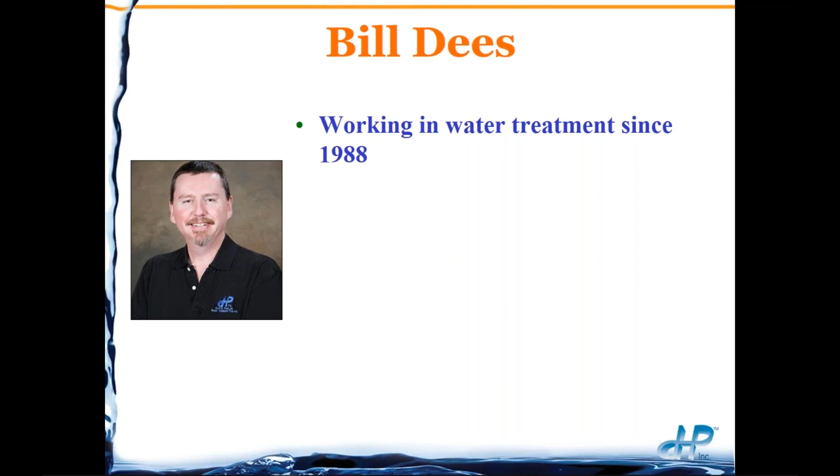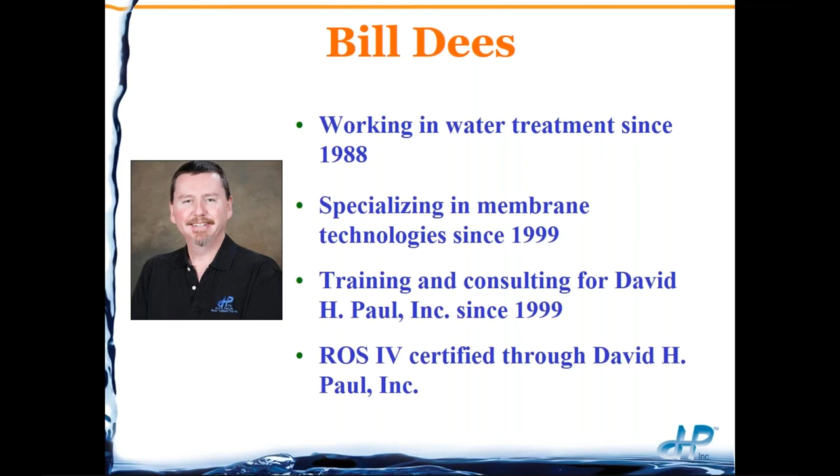My background: I've been working in water treatment since 1988, specializing in membrane technology since 1999 when I started working for David H. Paul Incorporated as an instructor and consultant. I'm also RO Specialist 4 certified through David H. Paul Incorporated.

Eli began in the pump industry in 1980 as manager of an R&D laboratory at Union Pump Company. He's founder and president of Pump Engineering Incorporated from 1986 to 1997, where he developed the Turbocharger, and then in 1997 founded Fluid Equipment Development Company, or FEDCO, where he is CEO and Chief Technologist.

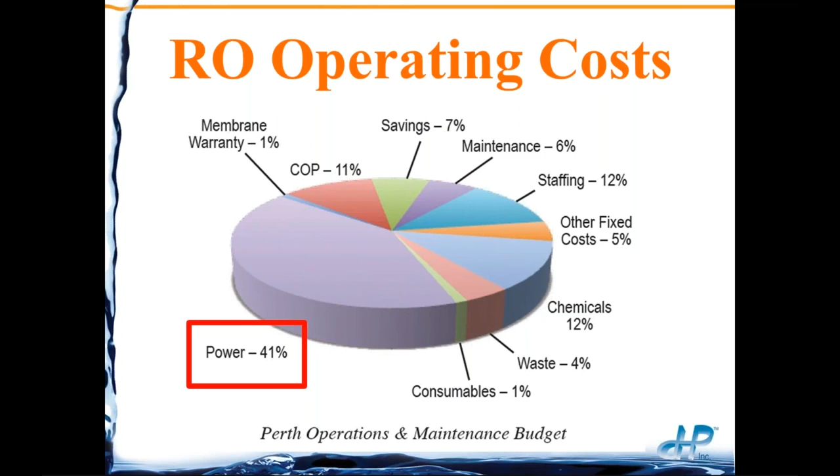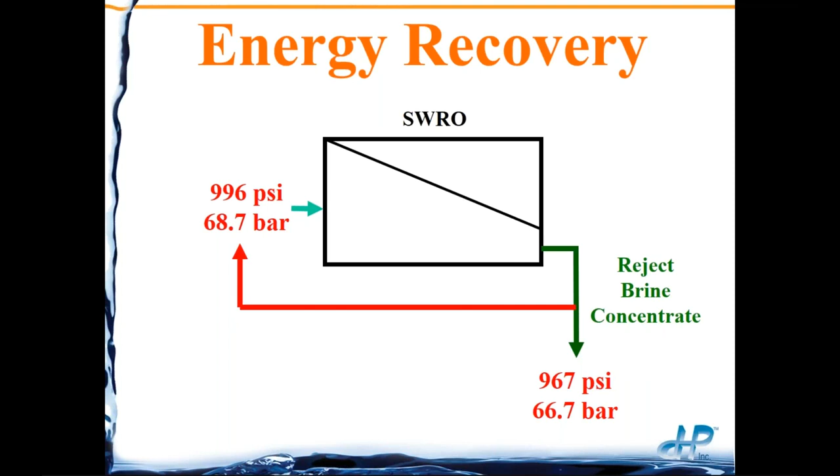Starting off with energy recovery: the biggest portion of RO operating costs is power. For example, with the Perth operation maintenance budget, we're seeing power at 41%. That's because seawater RO systems can operate as high as 1,000 psi or 70 bar of pressure on the feed coming in. With that amount of pressure going through the RO system, it would not make sense, it would not be cost feasible, to operate the unit with all that energy going down the drain. We need some way to collect that energy and transfer it back to the front end, to be able to operate at the higher pressures needed.

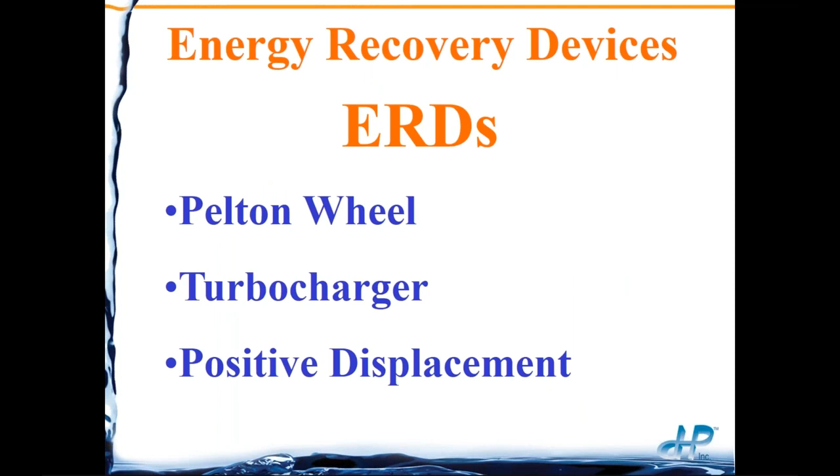So we need to have these energy recovery devices, and there are 3 basic categories of ERDs: the Pelton wheel, turbocharger, and positive displacement.

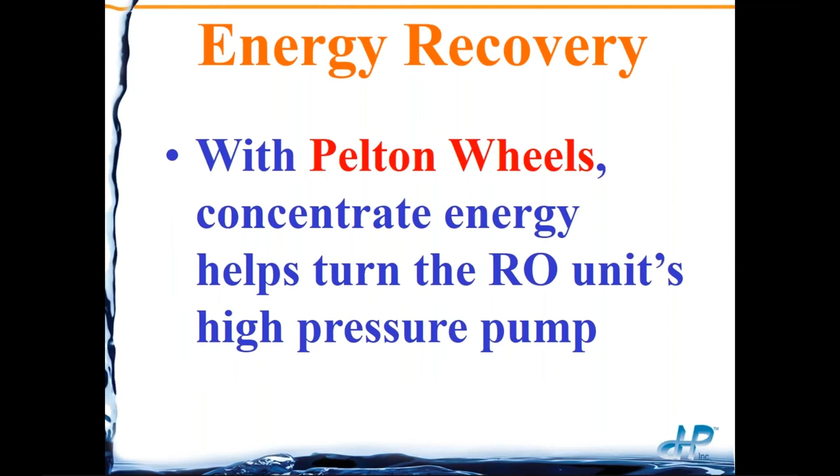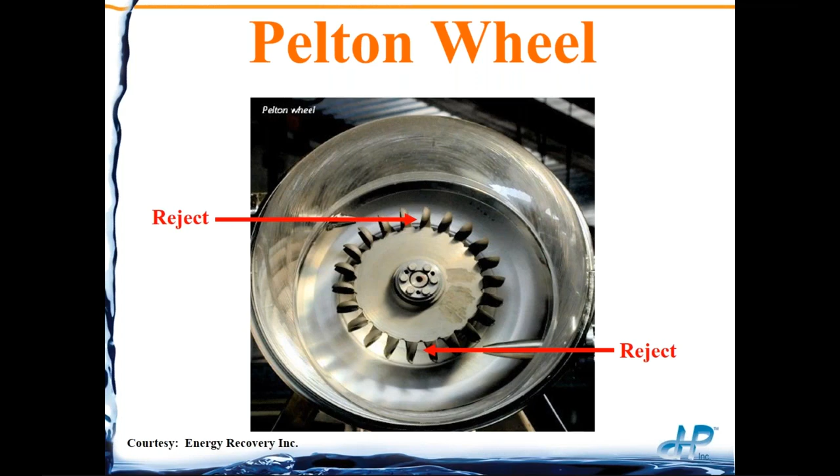The Pelton wheel takes the concentrate, or waste energy, from the RO unit and transfers it into the high pressure pump shaft. For example, we have vanes that are directly connected to the high pressure pump, and reject nozzles forcing water aimed at these vanes to help turn the shaft of the high pressure pump.

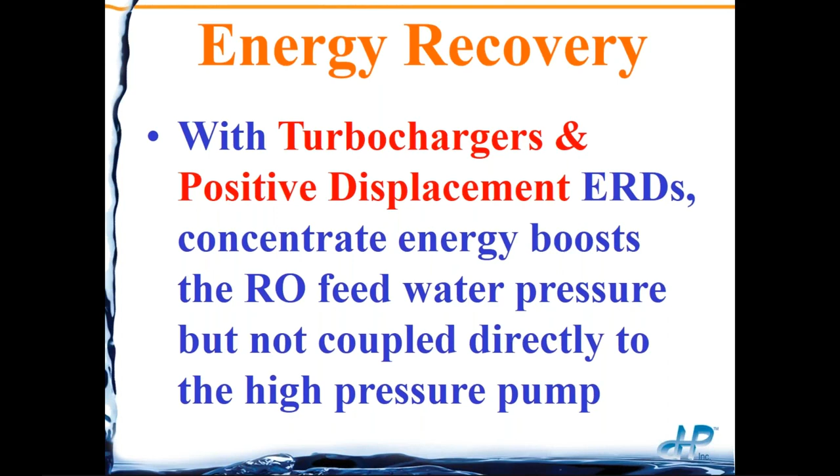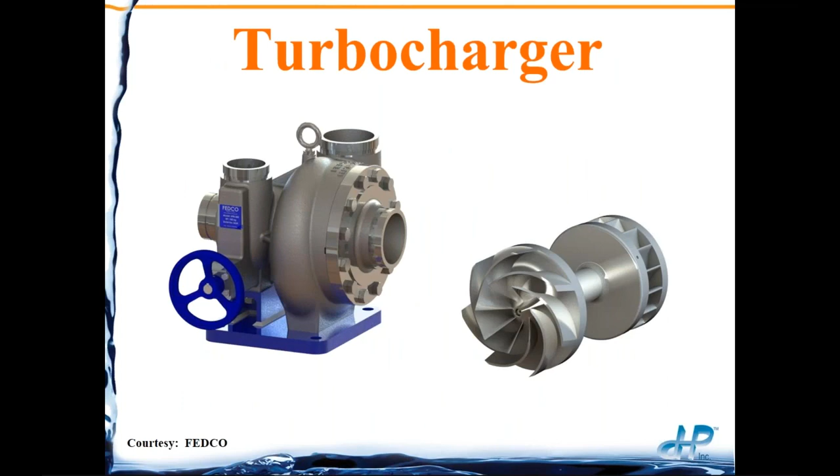Turbochargers and positive displacement ERDs take the concentrate energy and boost the RO feed water, but they are not directly coupled to the high pressure pump. For example, here is a turbocharger showing the impellers on the right hand side. The concentrate comes out, going through the impeller on the left-hand side and then exiting out. That impeller is directly coupled to the input impeller, which then boosts the pressure going to our single stage RO system. As shown in the upper right corner, the turbocharger can also be put in a two-stage system, utilizing it as an interstage booster pump.

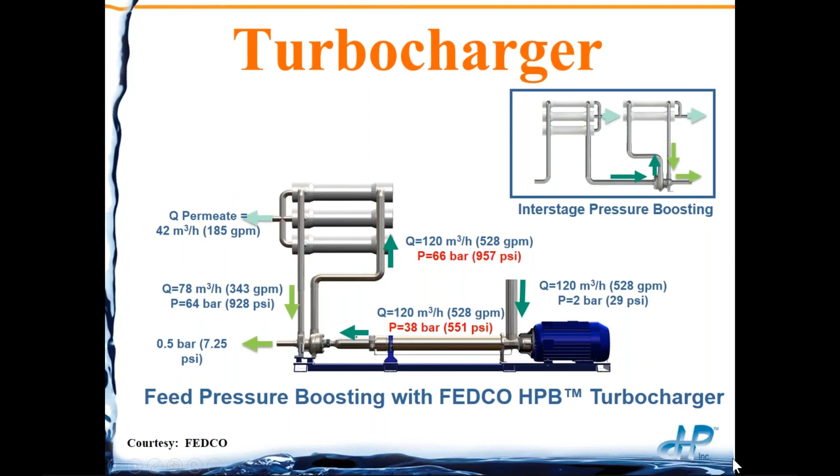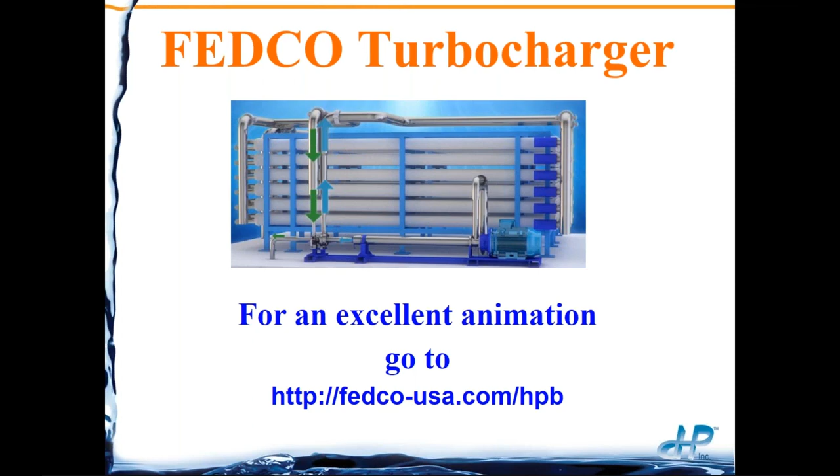Here's an example of a large turbocharger installed. Besides this presentation, you can go to FEDCO's website for an excellent animation so you can see exactly how these turbochargers also operate.

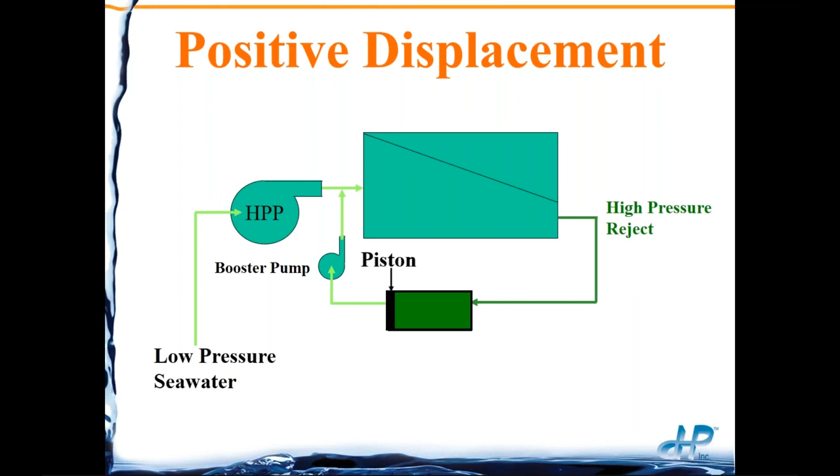For the positive displacement type setup, we have our high pressure pump with low pressure seawater coming in, going through the RO system. Now we have that high pressure reject that we need to reclaim energy from. There's a device with a piston that moves back and forth, and that high pressure reject pushes the piston over, forcing the low pressure seawater into the front end of the RO system. Since we have a pressure drop across the RO system, we won't get up to the higher pressure the high pressure pump puts out, so a booster pump is also installed to get up that remainder of the pressure.

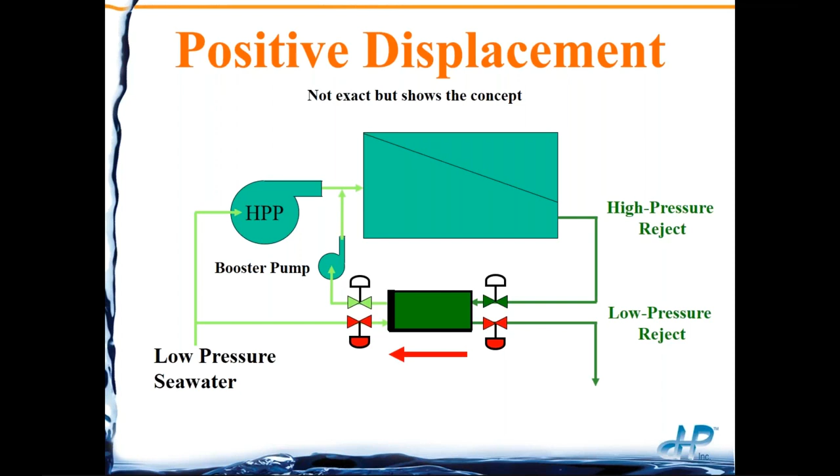As a concept here, not exact, just to show what we have with positive displacement: we have 4 valves with low pressure. The bottom valves are open. Low pressure seawater comes in, pushes the piston to the right, the low pressure reject valve is open, which then goes out to atmosphere. The valves automatically switch to the high pressure reject, opens up, pushes the piston over towards the left in this example, and boosts the pressure going into our feed water source.

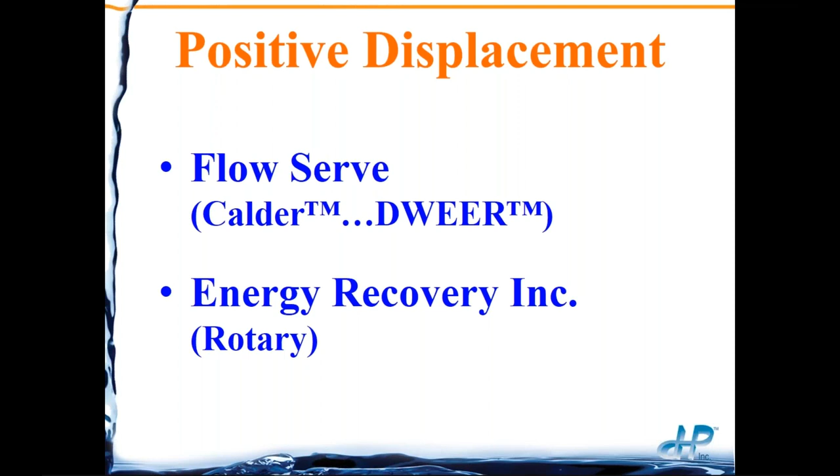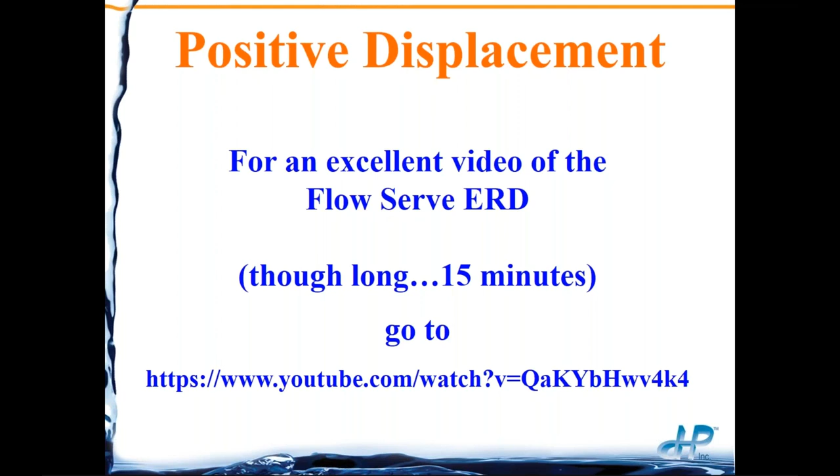So now I'm going to turn this over to Eli, and he is going to describe the turbocharger setup.

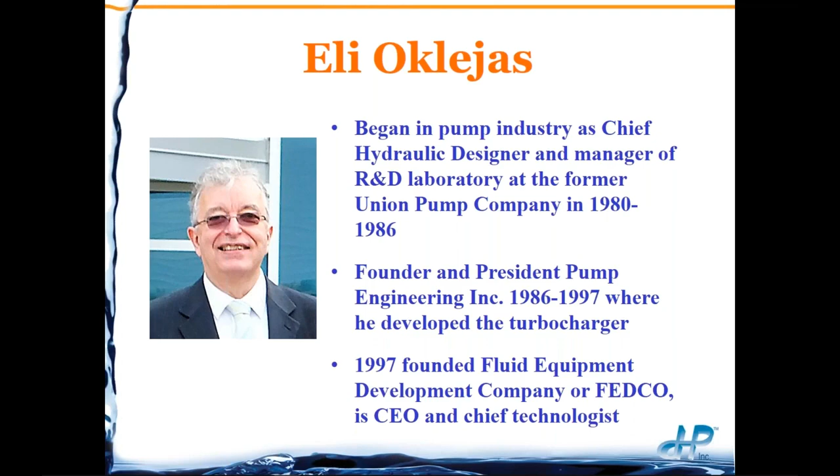Eli? Thanks, Bill. That's a great introduction. It helps my presentation quite a bit. Basically, we're going to be talking today about FEDCO turbochargers, plus we'll be taking an overview of other ERDs so we could do a fair comparison between the technologies.

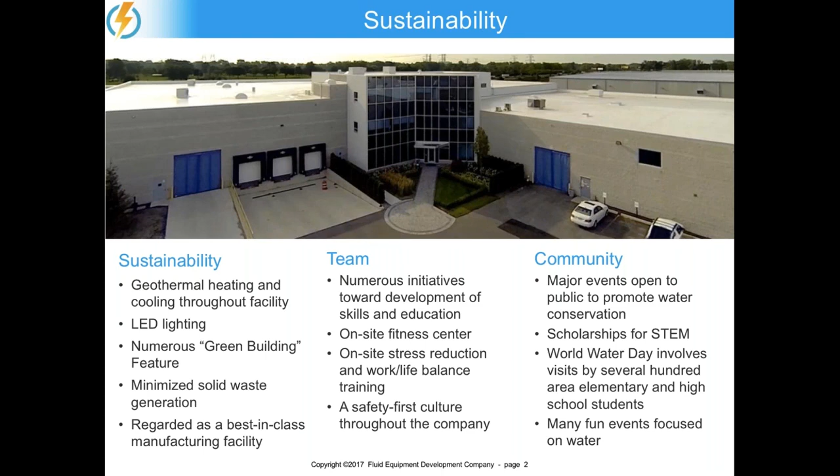Sustainability includes the community as well. We have major events open to the public to promote water conservation. We provide a number of scholarships for STEM students - science, technology, engineering, and math. We have a very high-profile World Water Day observance where we invite the public to our facility to learn more about water, sometimes with up to several hundred area elementary and high school students. They submit posters, we have contests, and we have a lot of fun with water. We really want to get the word out about the importance of water, water purity, and water scarcity to the public.

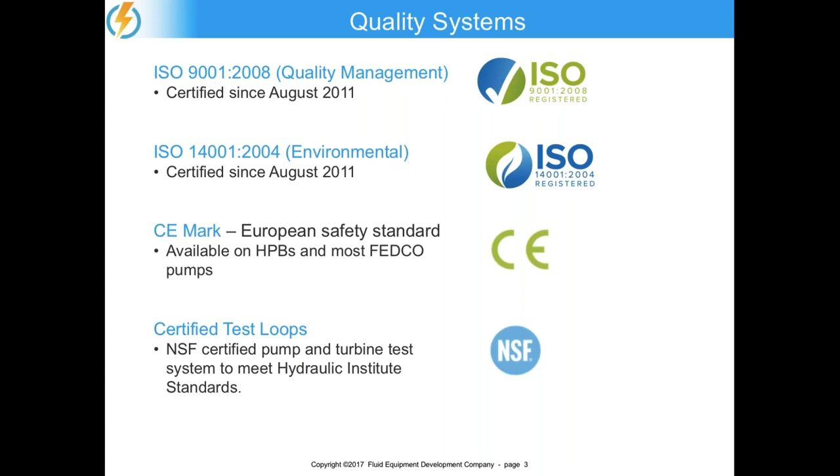Quality systems are important, of course. We're ISO 9001, ISO 14001. We have the CE mark for most of our equipment. Something not too common in our industry is our test loops are certified by a third party, NSF in this case.

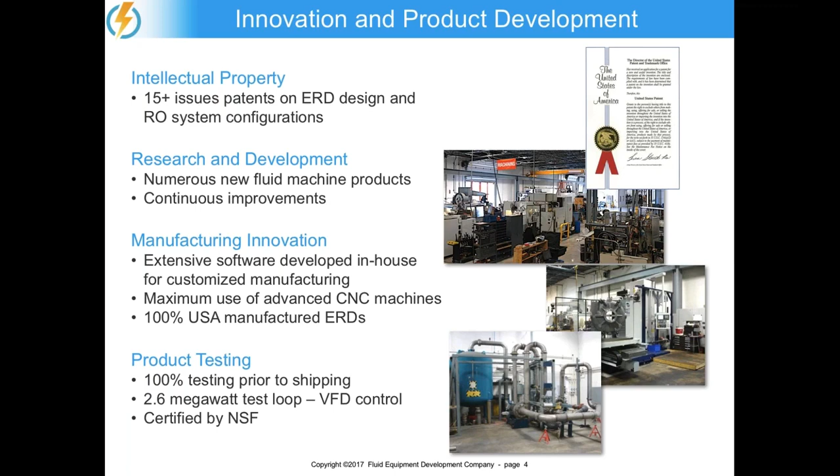In terms of product testing, all products are tested. We have a number of test loops. The biggest test loop is 2.6 megawatts under VFD control, and it's certified by NSF to comply with Hydraulic Institute and ASME test codes.

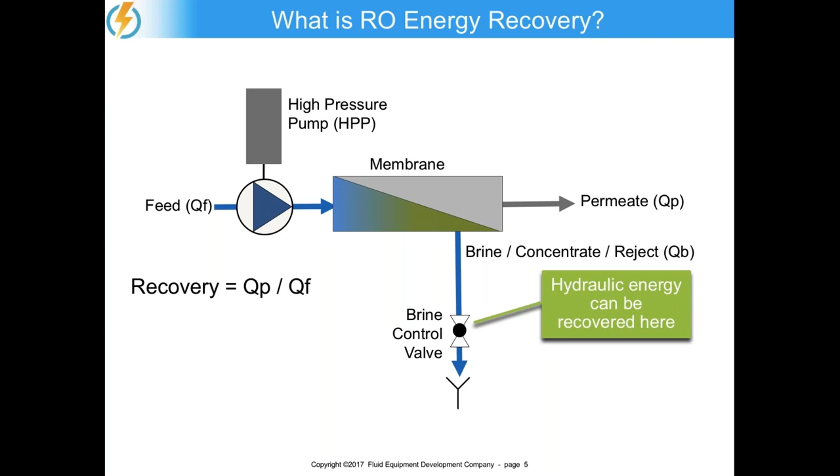An important concept here is what we call recovery. That's the ratio of permeate flow to feed flow, so we need to keep that parameter in mind as we go forward.

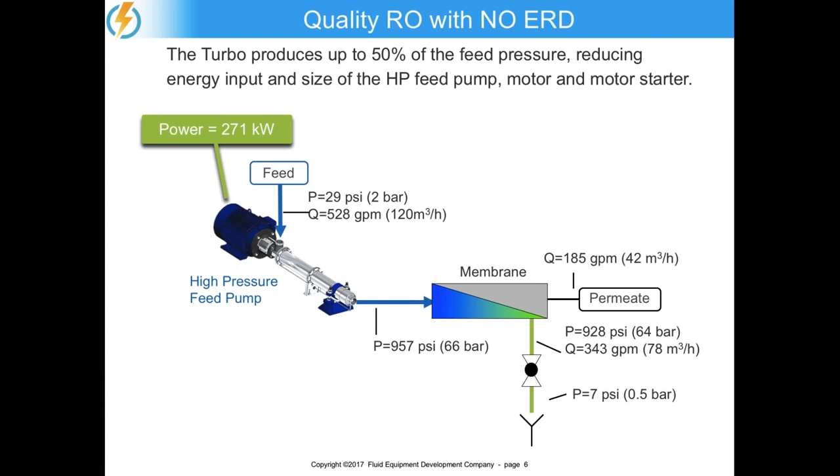When you don't have energy recovery, this is how the system looks. In this case, we have a membrane that takes about 957 psi of feed pressure. The flow rate is roughly 528 GPM. Out of that membrane array, you have a permeate stream of about 185 gallons per minute, and a reject stream of 343 gallons per minute at a pressure slightly lower than feed pressure. With reasonable assumptions on high pressure pump efficiency and motor efficiency, this system would consume about 271 kilowatts of electrical power to operate. So keep that number in mind, 271.

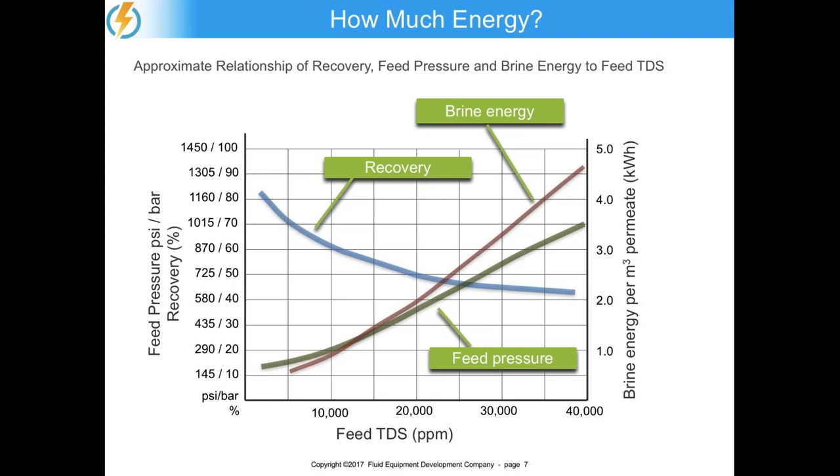So there's a big incentive to use RO energy recovery for high pressure systems. But as we shall see, it also makes sense for low pressure, low TDS systems.

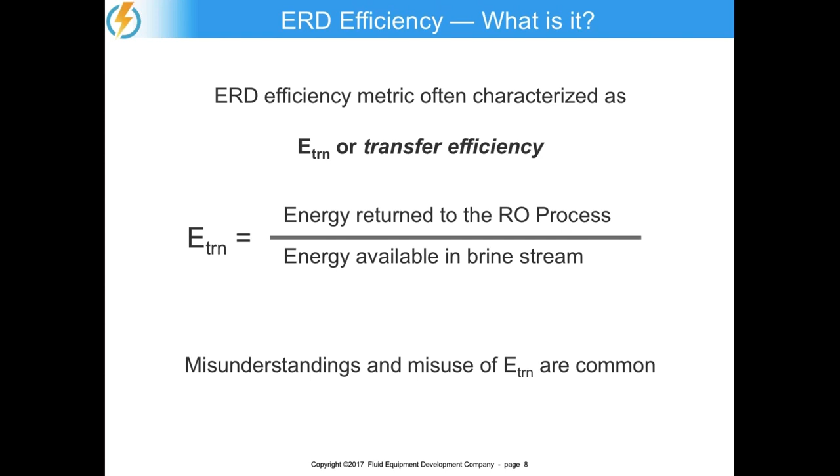Now, a metric that's used to evaluate ERD efficiency is something called transfer efficiency. It's a simple definition—basically the amount of energy returned to the RO process divided by the amount of energy available in the brine stream. It's a simple definition, and unfortunately, like many simple things, it oversimplifies the comparisons. So transfer efficiency has led to some misunderstandings and misuse, and we'll be exploring those issues and how to address them.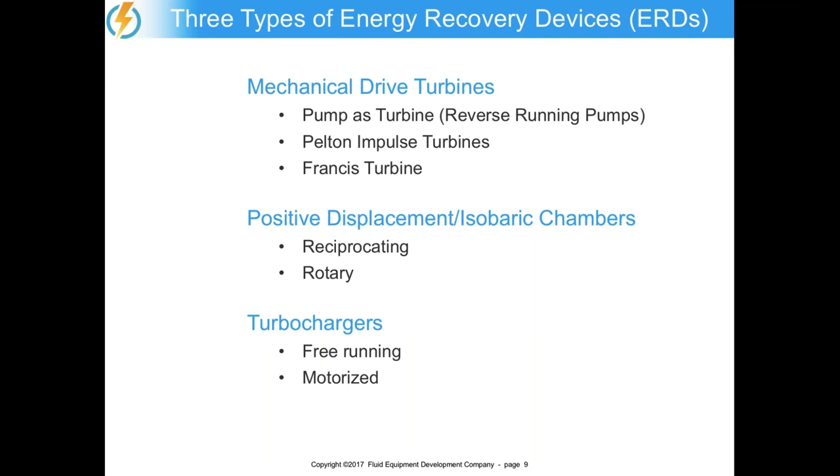There are three types of energy recovery devices, as Bill mentioned. The first classification is mechanical drive turbines, which does include Pelton turbines. The next classification is positive displacement isobaric chambers—there are two types, reciprocating and rotary, as mentioned by Bill. And turbochargers can come in two varieties, the free-running turbocharger and the motorized turbocharger.

For mechanical drive turbines, we have reverse running pumps, which were initially applied to RO systems, but they're really pretty much out of favor because they have limited efficiency and a narrow hydraulic range.

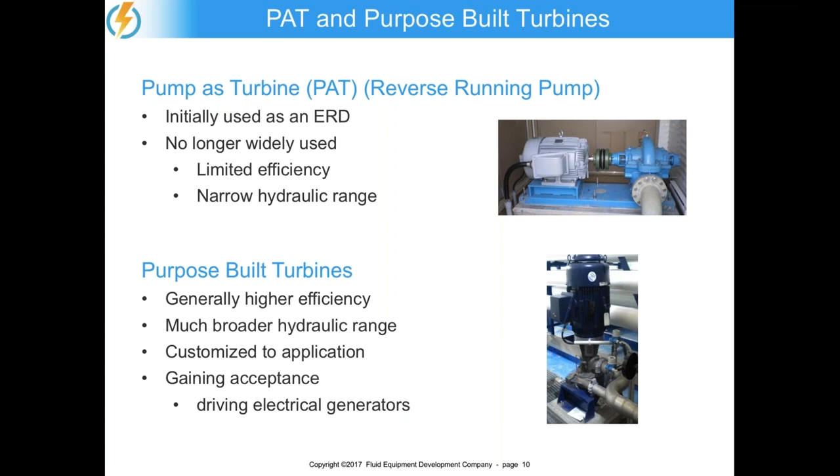Bill gave a good discussion on Pelton turbines, so we're just going to look at what we call purpose-built or mechanical drive turbines. These are designed for RO applications and for the hydraulic range and experience in RO systems. They generally have somewhat higher efficiency, much broader hydraulic range, and they're usually customized to the specific RO installation so they can capture a large fraction of the available energy. They are gaining acceptance, and generally they're used to drive electrical generators. We'll be looking at some examples of those a little bit later.

For isobaric chambers, as Bill mentioned, they basically use the brine pressing against the feed. There could be a piston, or there may not be a piston, and the two streams may be in contact with each other. Looking at the schematic, we see two pumping chambers. The lower chamber is being filled with low pressure feed, which is pushing the brine out the drain. Note that the feed water from your pretreatment system has to be at a higher pressure than your brine disposal, otherwise there won't be enough pressure to force the brine down the drain. On the upper chamber, we see high pressure brine pushing feed water out toward the membrane, and that feed water then needs to be boosted in pressure to match the membrane pressure.

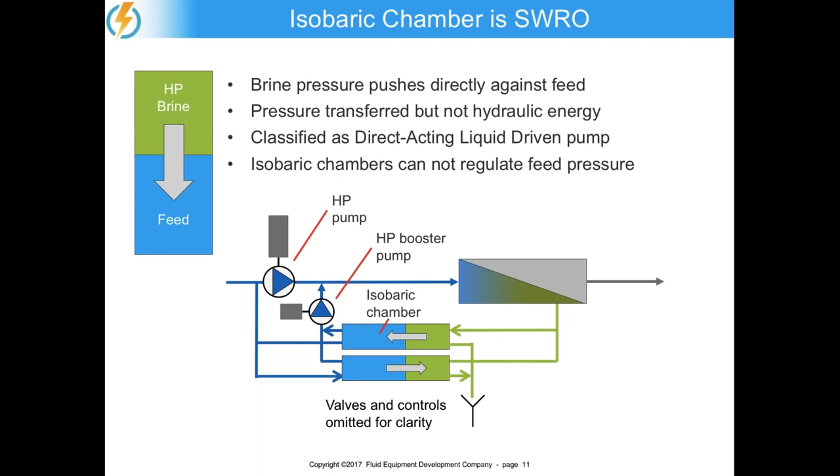A couple of things to remember—one important thing is isobaric chambers cannot regulate feed pressure. The high pressure pump establishes feed pressure.

Okay, we're going to be looking at rotary isobaric chambers in a little bit more detail. They're pretty common in many applications, so we'll take a deeper look into their operation and their characteristics.

Here we see a picture of an installation. There's 4 of these rotary isobaric chambers in that installation, and to the right, we see a simplified schematic of the isobaric system. The rotary isobaric chambers only comprise a portion of the total system. We know there's a high pressure booster pump, control valves, usually 2 precision flow meters, 4 manifolds - high pressure feed, high pressure brine, low pressure feed, and low pressure brine manifolds. There's other instrumentation required to operate the system. So it isn't just isobaric chambers we're talking about - we're talking about the system needed to make these chambers work.

Important point here is that they pump a side stream of the feed, so they operate in parallel with the high pressure pump. So the isobaric chambers reduce the capacity of the high pressure pump.

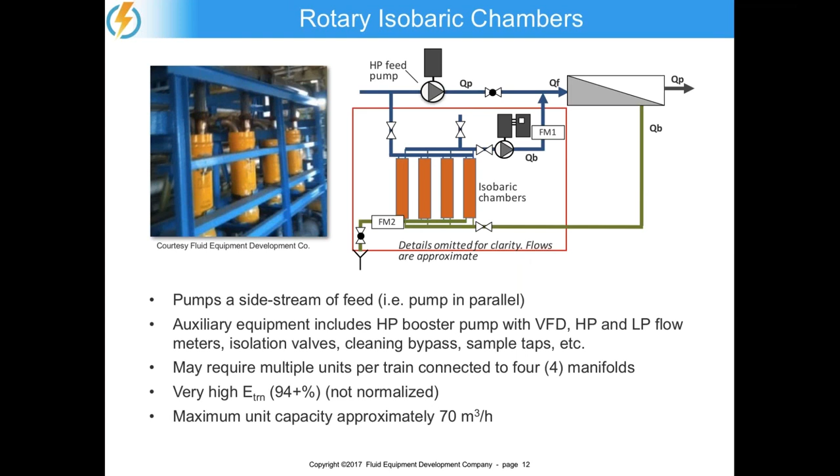As I mentioned, there's a lot of auxiliary equipment, and for whatever reason, rotary isobaric chambers seem to be limited to about 300 gallons per minute. They've been at that size range for many years, and that seems to represent the highest available capacity currently out there, or that may be out there in the near future. So for this example here, we see 4 units simply because the brine flow requirements exceeded the unit capacity, so they needed 4 units in this case.

This chart here illustrates how they function. It's a little bit hard to explain, but I'll do my best. If you look at the left cutaway, we see a dashed line that runs vertically through the casing of the unit. The left side of that line is the low pressure side of the isobaric chamber. The right side is the high pressure side.

We see passage A. Passage A is, at this point in time, accepting low pressure feed. That low pressure feed is pushing the brine out to the low pressure brine outlet. On the right side, channel B, high pressure brine is driving feed water toward the membrane. So you got these 2 fluid interfaces that ideally are 180 degrees out of phase, although there's no actual positive control to regulate their position.

So the key here is that before the fluid interface on each side of the unit reaches the exit, the rotation of that orange section, that rotor, will have carried the chamber over to the opposite side, and then they'll be subject to discharge by the corresponding stream. So if we look at channel A on the left side, it's now being filled with low pressure feed. Ideally, rotation will carry that channel to the right side of the unit before the fluid interface escapes from the unit, and the same applies for channel B. So you got these 2 channels, ideally 180 degrees out of phase.

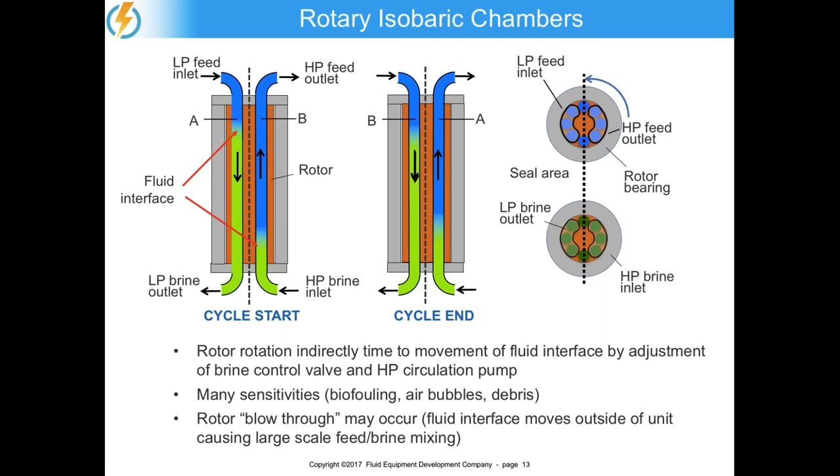Something called rotor blow-through may occur where the interface escapes the unit, and then you have a very high degree of brine entering the membrane, or a high degree of feed water going down the brine drain. There's a lot going on here. I hope that didn't confuse anybody, but the illustrations, I think, are hopefully self-explanatory.

Here's an array of isobaric chambers here. Again, the reason for the number of units is because of limited capacity. But I have to say that the fact that they could be ganged together allowed the isobaric chamber to be adopted fairly early as mega project seawater RO systems were being built.

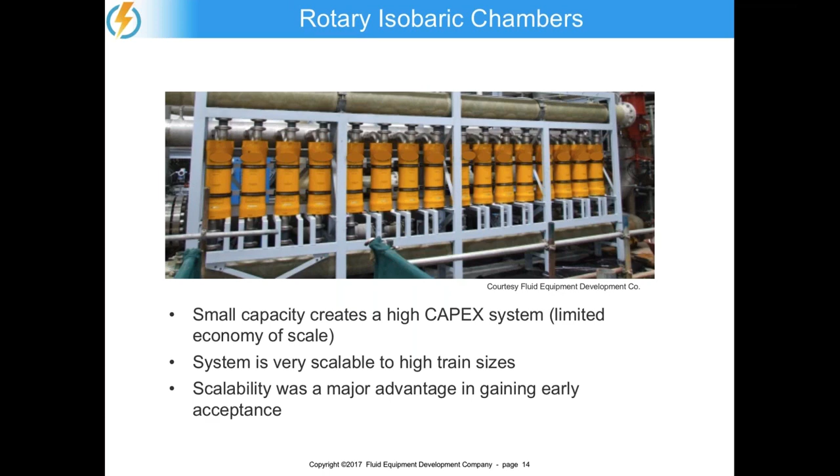ERD such as a turbocharger, which only requires 1 unit per train, had to go through many years of successively larger and larger units to prove out reliability and efficiency. The very good news, though, is that the turbocharger has now been installed and is operating successfully on the biggest RO trains in the world. So we are now where we need to be in terms of bringing this technology to all RO systems.

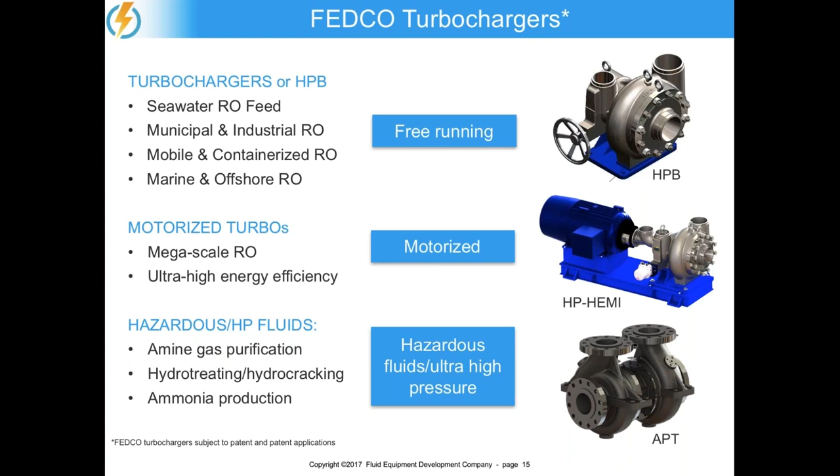Okay, there's 3 types of turbochargers offered by FEDCO. There's a free-running turbocharger, a motorized turbocharger, and a high-pressure turbocharger meant for hazardous or ultra-high pressure applications. We're going to be focusing on the free-running and motorized turbocharger for RO applications.

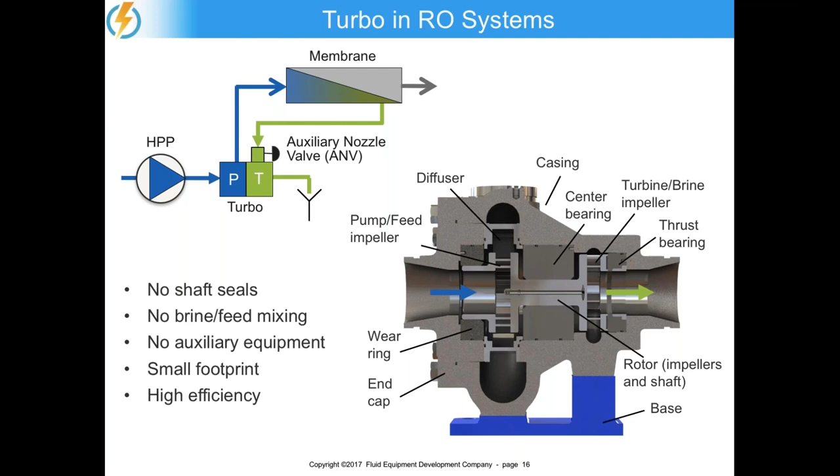There's basically one end cap to this unit. It's a very simple unit, very small footprint, and as mentioned earlier, there's absolutely no auxiliary equipment. So this turbocharger comprises the entire ERD system, and as we shall see, the efficiency is quite high as well.

What this chart shows is the blue portion, the range of FEDCO hydraulic turbocharger operating range. We go from down to about 6 cubic meters up to over 3,000 cubic meters per hour of feed water. Our smallest unit in the field is 8 cubic meters per hour, and our largest is about 2,600 cubic meters, or nearly 12,000 GPM of feed water.

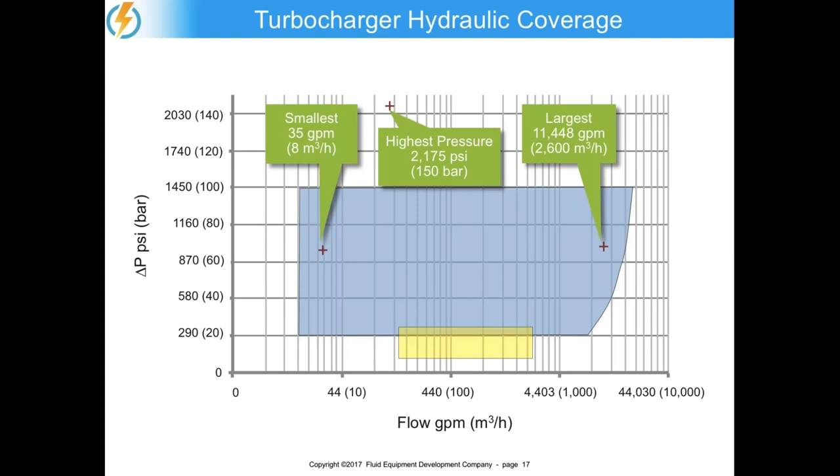The pressures typically run 65 to 70 bar, and our highest pressure unit is 150 bar. So you can see we cover a very big hydraulic range with our equipment, covering all applications from basically 4 to 5 cubic meters per hour up to the largest systems in the world.

Going back to our first example, if you stuck a turbocharger between the high pressure pump and the membrane, the high pressure pump discharge pressure is reduced down to 33 bar. If you recall, it was 66 bar, so basically the turbocharger cut the required pump pressure by 50%. Now the power consumption of the pump is 135 kilowatts.

The turbocharger is totally automatic. There's not one bit of adjustment required to start the system—simply start the high pressure pump, and the turbocharger generates the boost automatically. We can discharge brine against any back pressure; there's no linkage between brine discharge pressure and the feed pressure, and no brine intrusion into the feed stream under any operating mode.

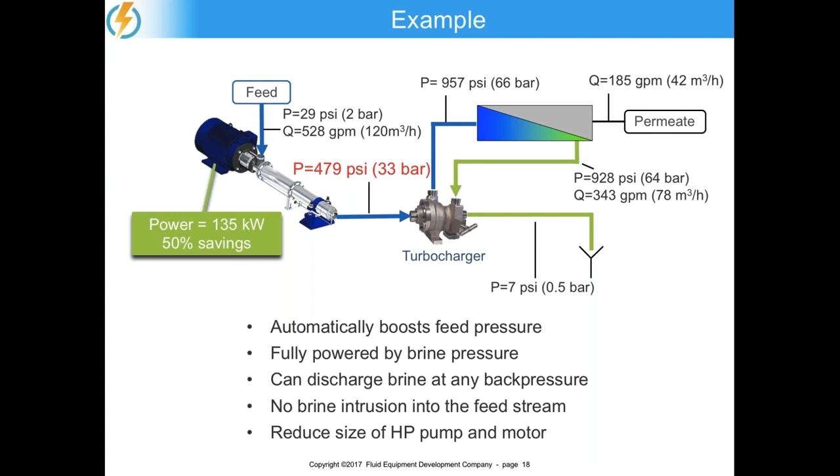And of course, the high pressure pump, motor, and VFD or motor starter in this example is reduced by 50% in its rating. So it's a big CapEx savings as well.

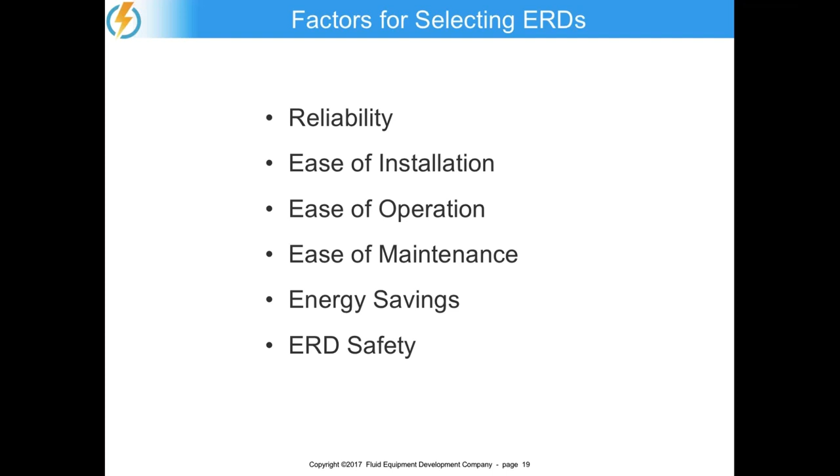So what do you look at when you select a turbocharger or select an ERD? Well, people with experience first look at reliability. They look at ease of installation, ease of operation, ease of maintenance, and energy savings. ERD safety is at the end of this list, although it's the most important—the reason it's last is we need to discuss some features first before we could talk about safety.

Okay, the rotor of the FEDCO turbocharger is unique and patented. It's a one-piece rotor, very rigid. The first critical speed is well above the maximum operating speed.

These units are custom built to each individual system requirement. We developed a very extensive array of design software and machining software that takes basically an RO projection and turns it into CNC program code, where we produce an optimized hydraulic flow path for the turbocharger on both the feed and brine sides.

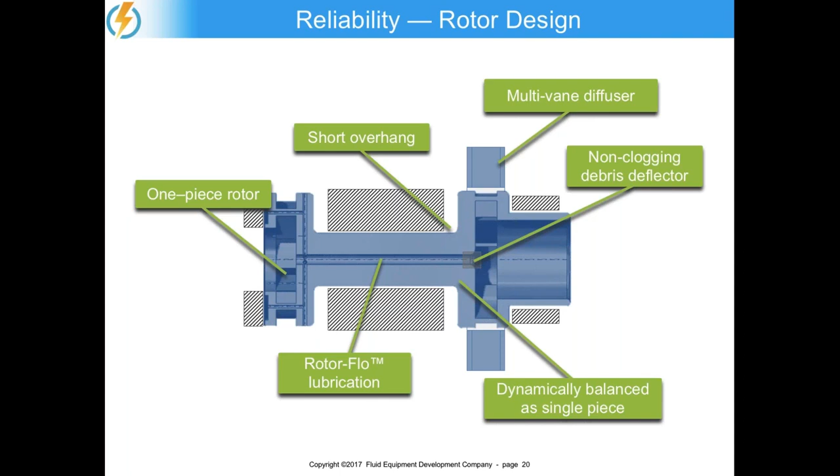This rotor includes a diffuser wrapped around the pump impeller, and we use what we call the Rotor-Flo lubrication system to bring feed water to lubricate the thrust bearing, located on the outboard face of the turbine impeller. There are many technical advantages of using this Rotor-Flo lubrication, and we'll discuss some of those a little bit later.

This other rotor, which was really my original turbocharger design way back in the day, uses multiple pieces, and I'm almost embarrassed to look at it now. It uses a stud attached to the turbine shaft, a keyway and key to secure the pump impeller to the rotor, and a retaining nut.

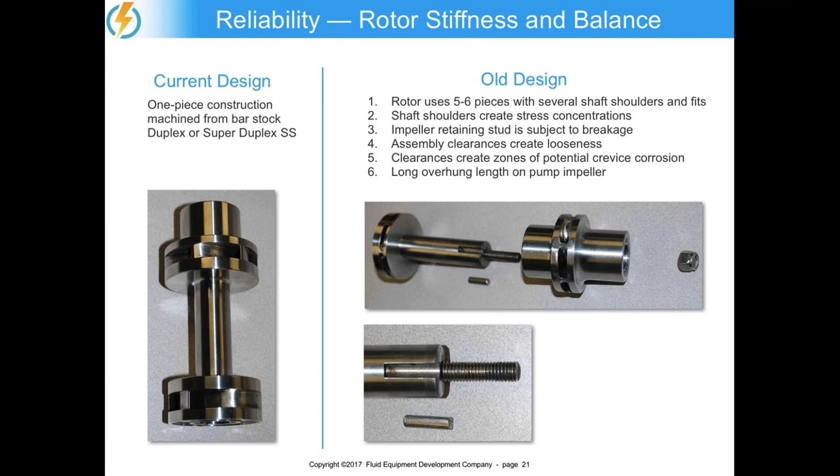Couple big problems. One is you have to have clearances to assemble this unit, which means you cannot maintain a high degree of dynamic balancing because of the looseness. The closed clearances create potential crevice corrosion sites. There's a long overhung length between the pump impeller and the center bearing location, and we'll talk about why that's important in a moment. There's also shaft shoulders, and the stud creates areas of stress concentration, which can and do fail.

We mentioned the Rotor-Flo lubrication. Here's an illustration of the rotor showing the internal passageways. It takes precision machining and a highly skilled machine shop to do this kind of work, but it's something we do every day. This has worked out extremely well for our units. We use this same design from our smallest units, handling 6 cubic meters, to our biggest units, handling up to 3,000 cubic meters per hour.

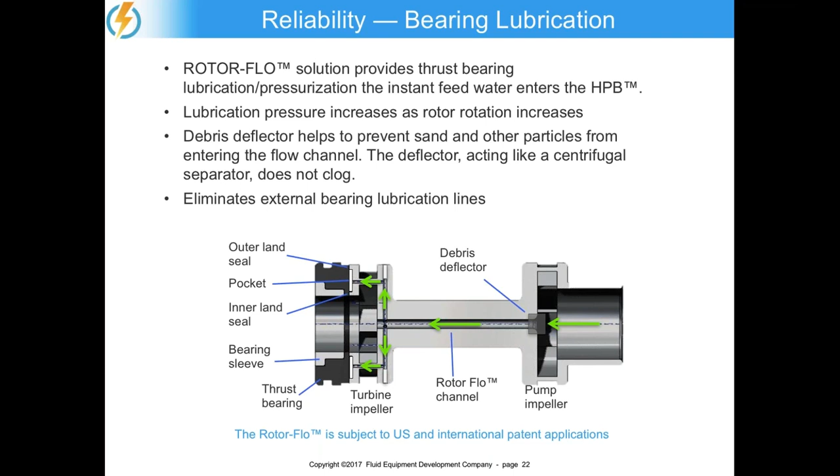A lot of advantages, among them eliminating external lubrication lines, which we'll be talking about in a minute.

We mentioned the diffuser being wrapped around the pump impeller, and why is that so important? Well, when you have a diffuser, there are many channels of flow. That results in a symmetrical pressure field around the pump impeller. So even when the unit is off design, there will still be a symmetrical, tangential pressure field around the impeller, so it would not be exposed to unbalanced radial forces.

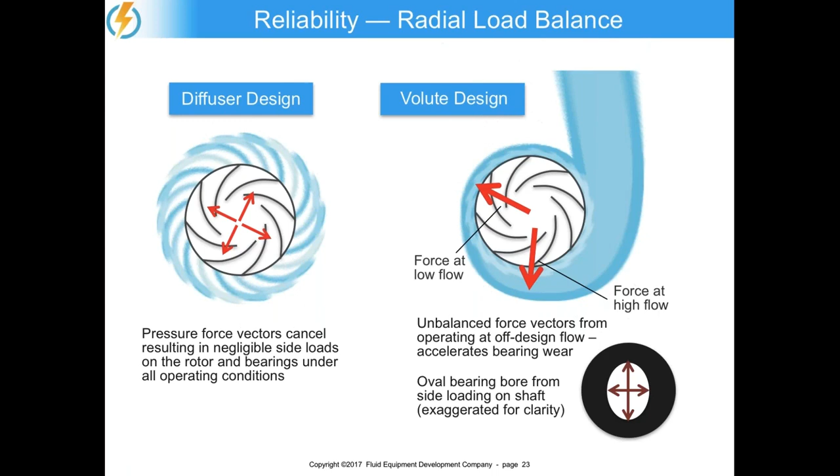What's important here is that the center bearing, which is product lubricated and doesn't have a high load carrying capacity because feed water acts as the lubricant, will become oval or egg-shaped. We've seen this many times. When the turbocharger operates at off-design condition with a single volute, you get an oval or egg-shaped center bearing.

We talked about the rotor flow design. Well, one of its benefits is it eliminates the external tubing used on other turbochargers. And these external tubes are a safety hazard, plus they represent maintenance items as well.

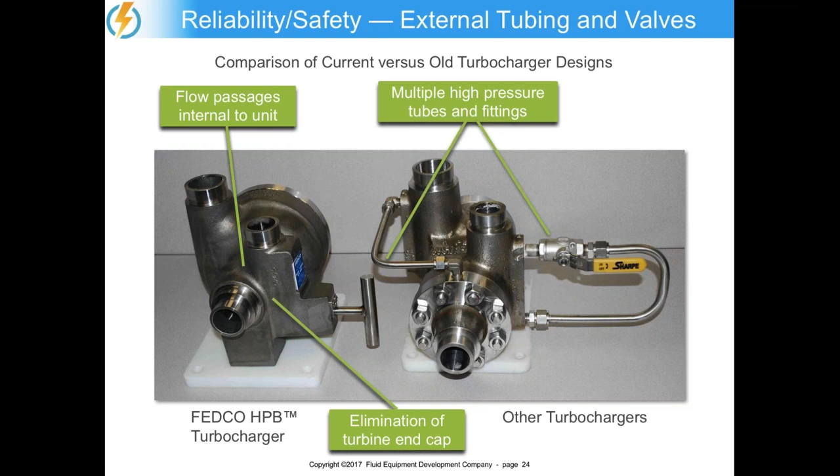You can see on the unit on the left, there's a high pressure tube which handles feed water for the thrust bearing lubrication. On the right, you see a high pressure tube with a valve, a quarter turn ball valve, that handles high pressure brine. So both of those represent leakage potential, maintenance potential, and frankly hazards. The state-of-the-art turbocharger has eliminated all external fittings and tubing.

Turbochargers are easy to install. You hook up 4 pipes, the brine inlet and outlet, the feed inlet and outlet, and that is the end of the installation. There's no auxiliary equipment, no pumps, no boosters, no manifolds. You can see a very small unit installed in the upper right photo, right next to a membrane housing, and another unit tucked into a small space near the membrane array.

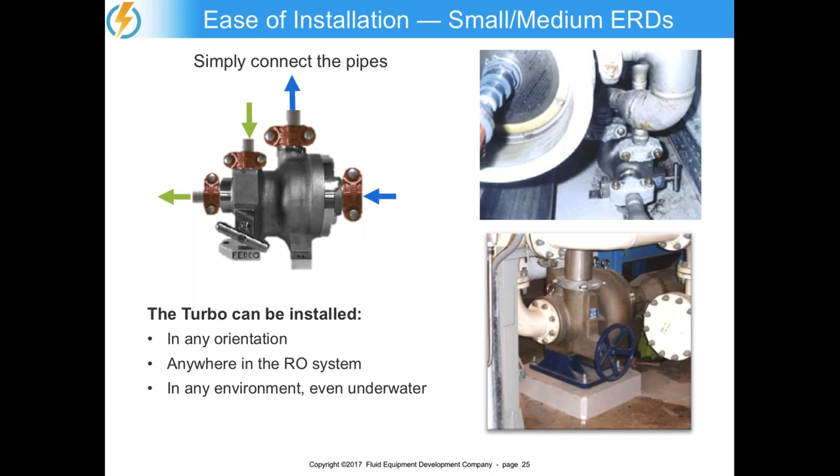Turbochargers can be operated in any orientation. They can be placed anywhere in the RO system. They can operate in the dirtiest, dustiest environments, could even operate underwater.

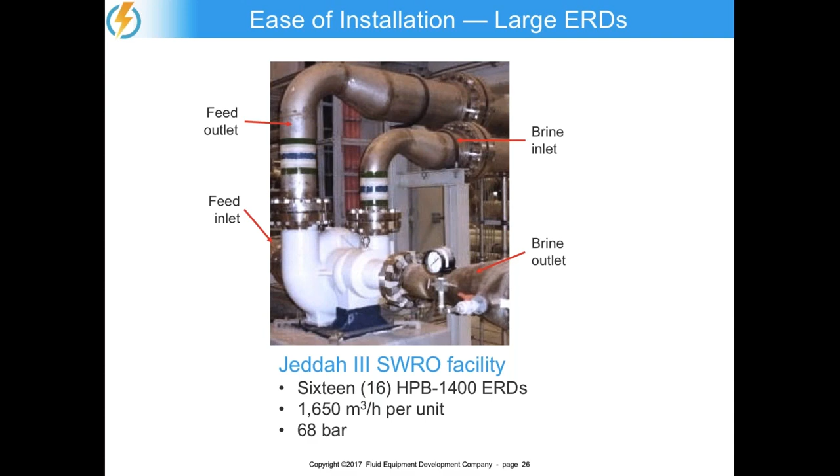We talked about one of the functions of the turbocharger being to regulate brine flow and pressure. The turbocharger does it this way: the turbine section has two nozzles. There's the main nozzle, sized during manufacturing based on the customer's operating point or points. Then there's a secondary nozzle, which we call the auxiliary nozzle, controlled by an external valve, the auxiliary nozzle valve. In the upper left illustration, the auxiliary nozzle valve is closed, meaning the brine must flow only through the single main nozzle.

This would represent an application where brine flow is low or is to be maintained at a high level. But if you need to increase brine flow or reduce brine pressure, you open up the auxiliary nozzle valve, which allows an additional flow path for the brine through the auxiliary nozzle.

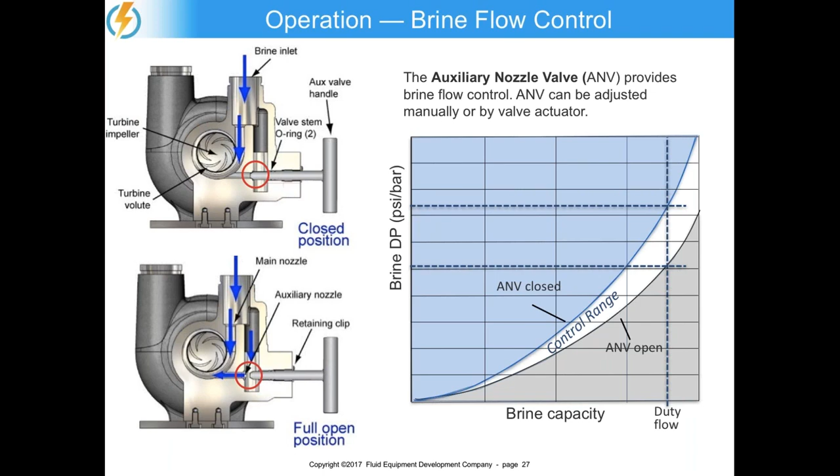The important point here is that the total brine flow still passes through the turbine impeller, and thus the total energy is recovered from the brine stream. The right graph shows a typical range from the auxiliary valve being closed to the auxiliary valve being opened.

Okay, this is where we're going to learn how to operate a turbocharger. This is it. This is, in one sense, the operating manual for a turbocharger.

To increase brine flow, open the auxiliary nozzle valve. To decrease brine flow, close the auxiliary nozzle valve. That's it. That's the end of the education.

And it's actually quite important because when a plant is commissioned, you have plenty of training. Everybody's excited, everybody knows how to run the plant. But after a few years, plant personnel change. If you have a complicated ERD system, you're going to have to do a lot of training on the new plant people, and they're going to go through a learning curve.

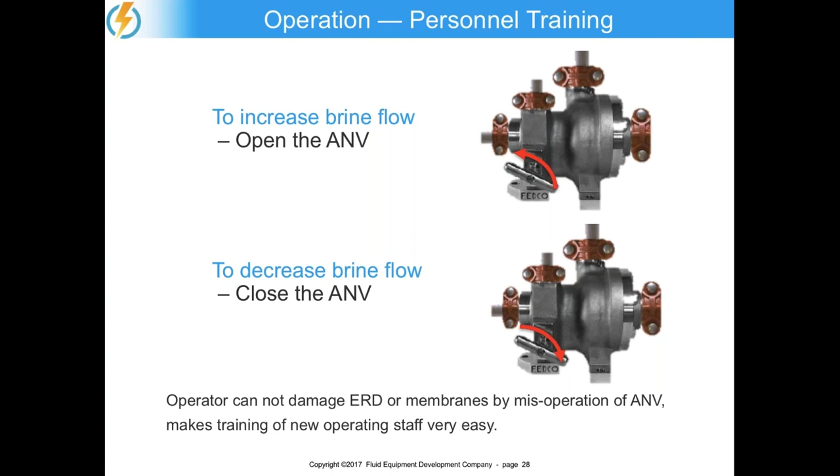With the turbocharger, this is the instruction: open the valve or close the valve. Very, very simple. There's nothing really an operator can do to harm the system through misoperation of the turbocharger.

Maintenance is equally easy as operation. Remove the end cap, push out the rotor cartridge, push out the thrust bearing, and to install a new thrust bearing and rotor cartridge, you simply push them in by hand.

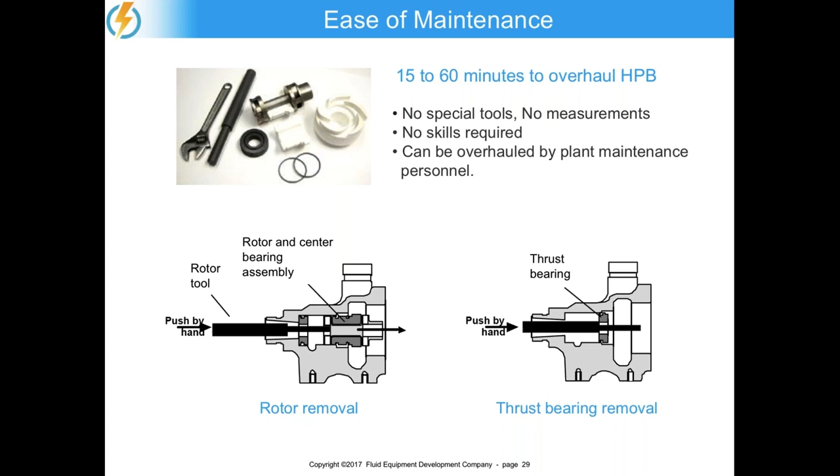A small turbocharger can be overhauled in 15 minutes. A large turbocharger may take an hour to overhaul. It could be overhauled by plant personnel. There's no skills required, no shims, no precision measurements. Simply undo the end cap, push out the old, push in the new, and that is it.

We talked about transfer efficiency and how it's in some ways useful, but it's also misleading. So what we do is apply normalization correction factors to transfer efficiency to account for the differences in ERD operation between isobaric chambers and turbochargers. If you don't do that, you'll be comparing apples to oranges, not the same efficiency. This table walks us through how to normalize transfer efficiency.

For the rotary isobaric chamber, it starts off great: 95% transfer efficiency. The highest turbocharger efficiencies we've obtained so far are 84%.

Now, we talked about the brine feed mixing in an isobaric chamber. Well, that's going to raise osmotic pressure because of the higher TDS of the feed stream. And when you run membrane projections to gauge that impact, it results in about a 3.8% increase in operating pressure. So that loss has to be charged against the isobaric chamber.

Large isobaric chamber systems have extensive manifolds and valves. We assume 1% pressure loss on the feed side, 1% pressure loss on the brine side, manifolds and valves. So we say a 2% loss of energy in the manifold and valve array.

We mentioned that the isobaric chamber pumps a side stream, or operates in parallel with the high pressure pump. That means the high pressure pump is handling a smaller feed flow than the feed to the membrane. In contrast, the turbocharger feed pump handles total flow, but at reduced delta P. So with the isobaric chamber, the high pressure pump handles a reduced feed flow at maximum feed pressure, while the turbocharger handles full feed flow at a reduced delta P.

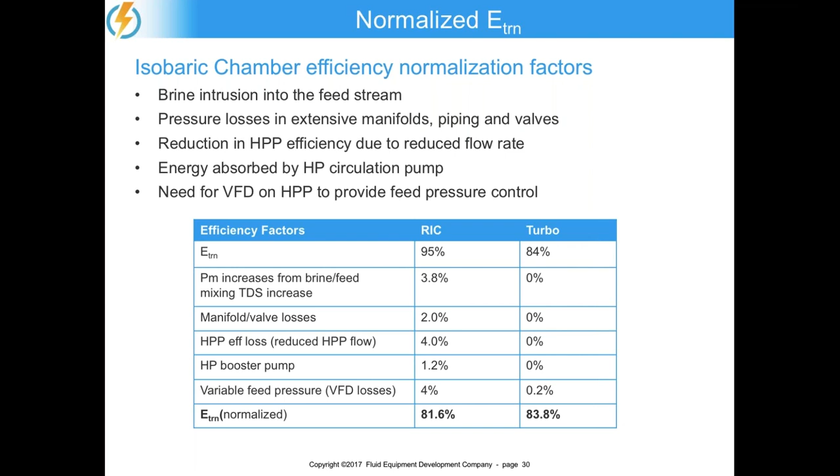And when you multiply out all these factors, that 95% for the rotary isobaric chamber becomes about 81.6 to 82%, and for the large turbocharger, 83.8%. So you can see how you have to normalize the transfer efficiency and account for the impact of the ERD on system operation. You cannot look at the ERD in isolation, otherwise there will be misleading and frankly mistaken conclusions made about which ERD would perform best in an RO system.

84% is pretty darn good efficiency. To achieve that, we have to have very high component efficiency, and so we do that by machining our impellers, our rotor, from bar stock. So we have precisely machined rotor geometry. Of course, the rotor is highly optimized using validated computational fluid dynamics analysis. We can pick the speed of operation so we can get optimal specific speeds.

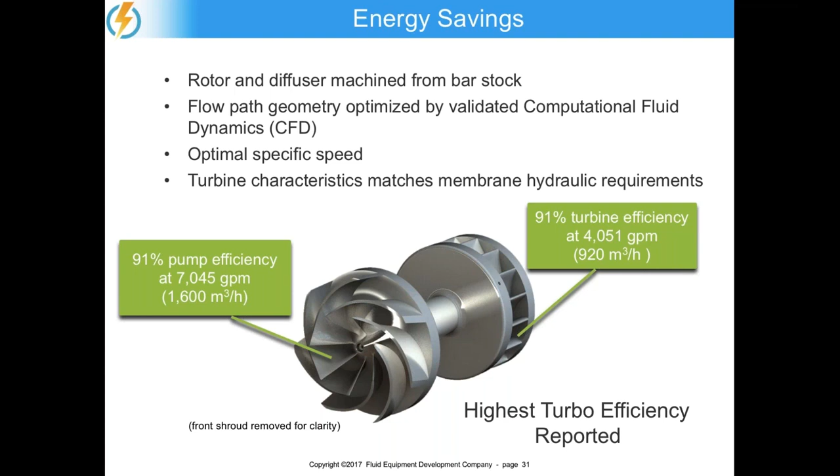For instance, the rotor pictured here has a 91% efficiency on the pump end at 7,000 GPM, and on the turbine end, which is the brine end, it has 91% efficiency as well, handling about 4,000 GPM of brine. So in this case, the transfer efficiency is a little bit over 82%.

ERD safety, certainly last but not least: with the isobaric chamber, with the turbocharger, it has 3 high pressure connections. With the isobaric chamber in a large system, you may have over 100 cut groove pipe joints. Mechanical seals: 0 for the turbo, several for the rotary isobaric chamber. High pressure valves: none for the turbo, numerous for the isobaric chamber. Leakage potential: 0, virtually 0 for the turbo, and for the isobaric chamber, because of the hundreds of pipe joints, it's extensive and pervasive.

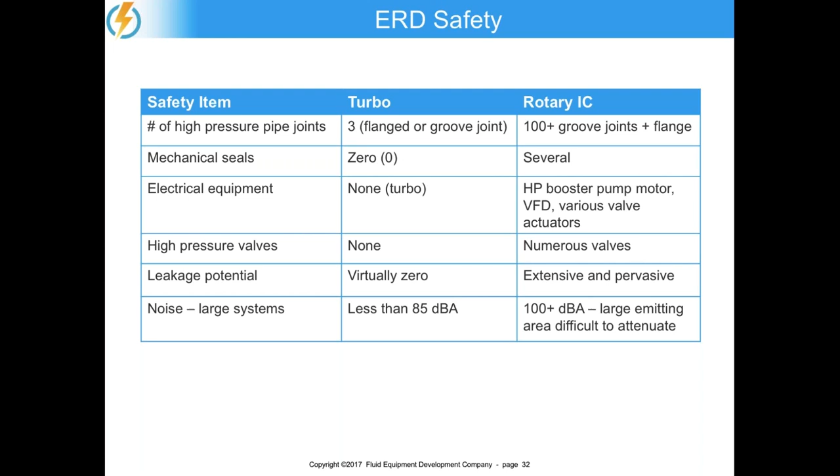Noise in a large system: less than 85 dBA from the turbo, and it's coming from a small source, a small component. With isobaric chambers, it can be over 100 dBA simply because there's so many units running and so much emitting area from the units themselves plus attached piping. So it's a large emitting area which would be difficult to attenuate.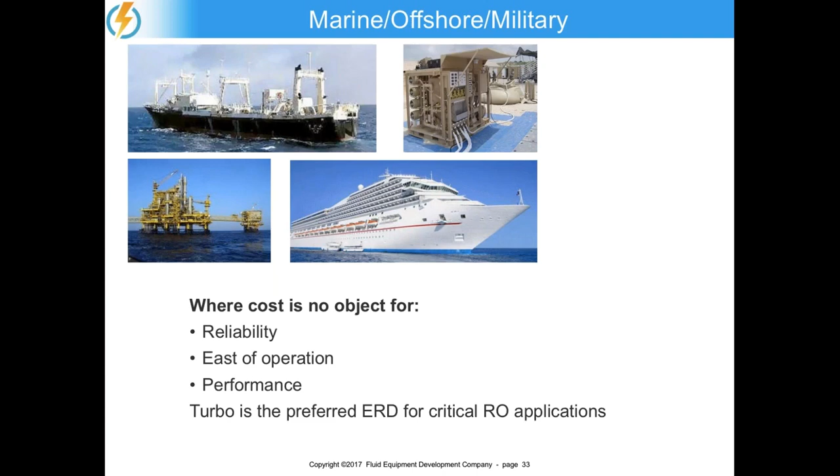So cost is no object. We use what kind of ERDs are used where reliability, ease of operation, performance are critical. Well, it turns out to be the turbo. Whether it's offshore platforms, military systems, cruise ships, factory vessels, it's the turbocharger.

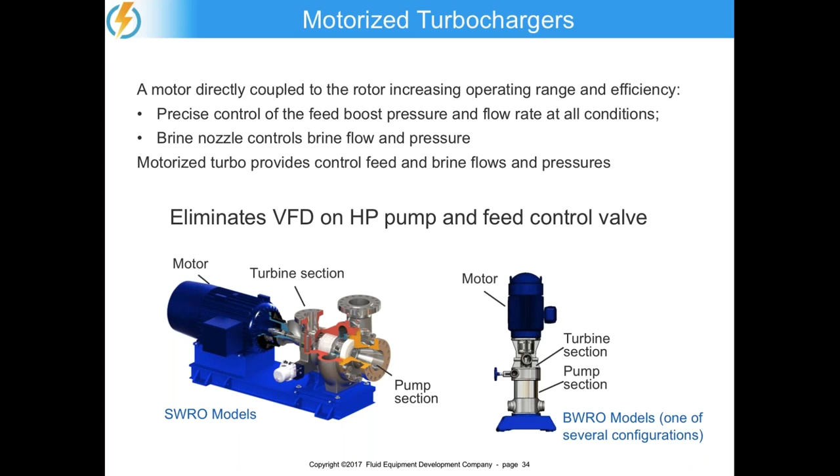All right, now we're going to be looking at motorized turbochargers. There's 2 types: the one on the lower left is designed for seawater conditions, and the one on the right is designed for brackish conditions. So what does the motor do?

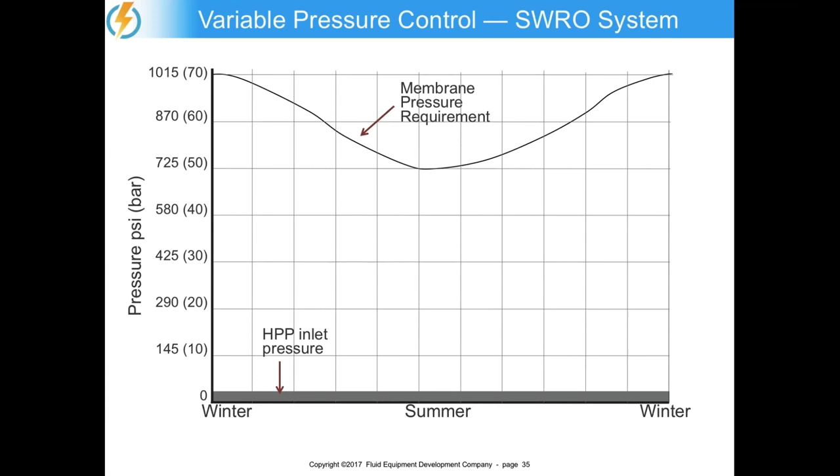Well, it does this. We're looking at a seawater RO system with a highly variable pressure requirement: 70 bar during the winter, 50 bar during the summer. So how do you get that pressure? Well, you get about 2 bar from the pre-treatment system. We're using a motorized turbocharger, so what that means here is that the feed pump doesn't have to produce a variable pressure output. It runs, in this case, delivering a constant 30 bar discharge pressure.

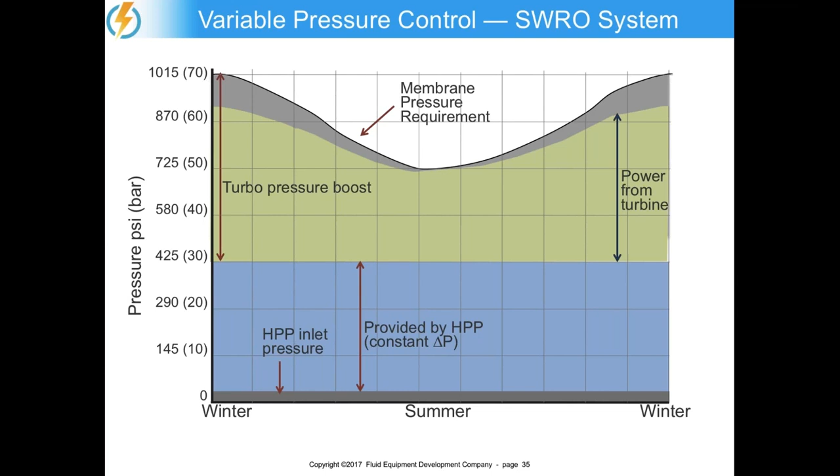There's no VFD on the high pressure pump, and there's no feed throttle valve anywhere in the system. So the motorized turbocharger will then modulate the rest of the pressure. You can see here that the turbocharger produces 40 bar during a boost during the wintertime, 20 bar during the summertime, and the energy for that boost comes primarily from the turbine section of the turbo, and then the balance is made up by the motor attached to the turbocharger.

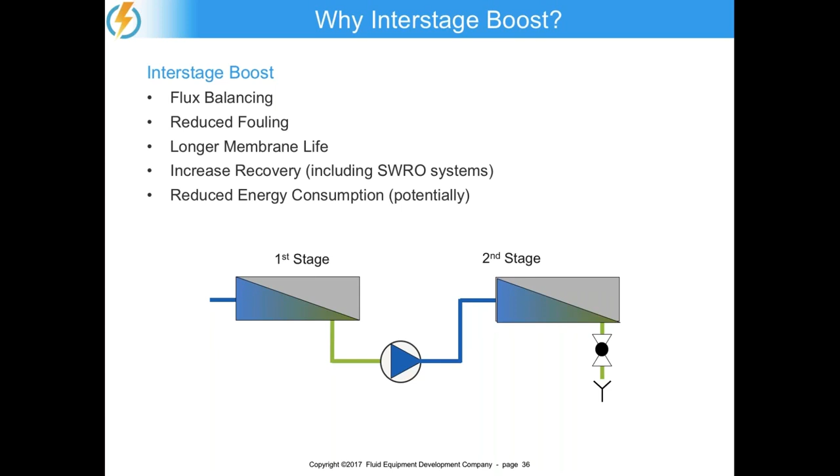The ideal way to do pressure boosting is to have a double duty device. In this case, we're using a turbocharger to do the boosting and to recover brine energy. So what makes energy recovery practical on these low pressure systems is that the ERD is doing 2 duties: energy recovery and pressure boosting.

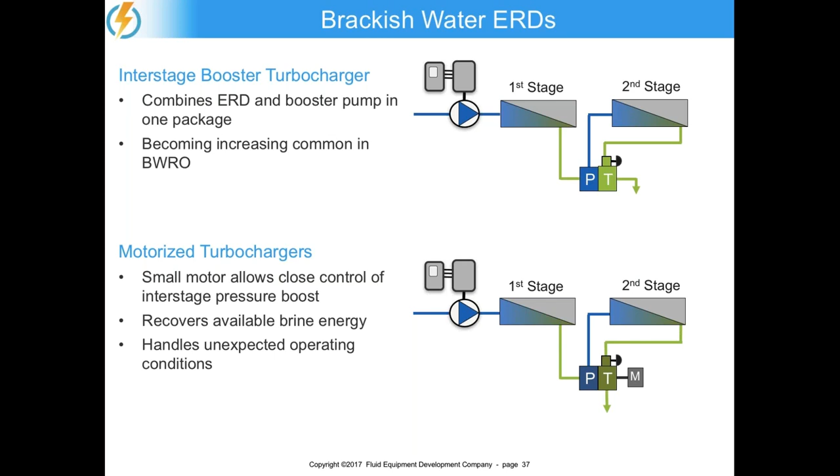The motorized turbocharger provides greatly enhanced performance because now the motor can be used to precisely control the interstage boost pressure amount, and it also, of course, recovers all the available brine pressure. So it really is a neat system. It allows accommodation of unexpected conditions, and provides precise control over the second stage operating conditions as well.

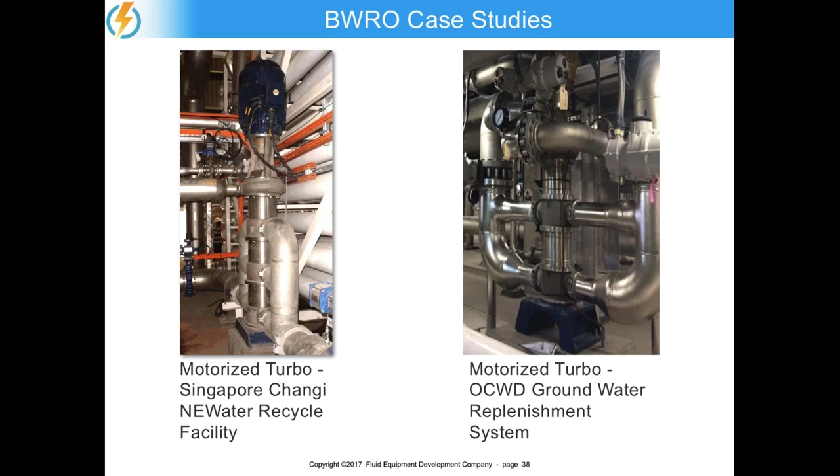Here's a couple of cases of motorized turbochargers. The one on the left is in Singapore at the Changi NEWater Facility. There are 10 installations of these units. I believe this is a 220,000 ton per day output system, and they're building another identical plant which will use 10 more of these same designs. In the new plant on the right, we see an installation in California for also a water recycle facility using, again, the motorized turbocharger.

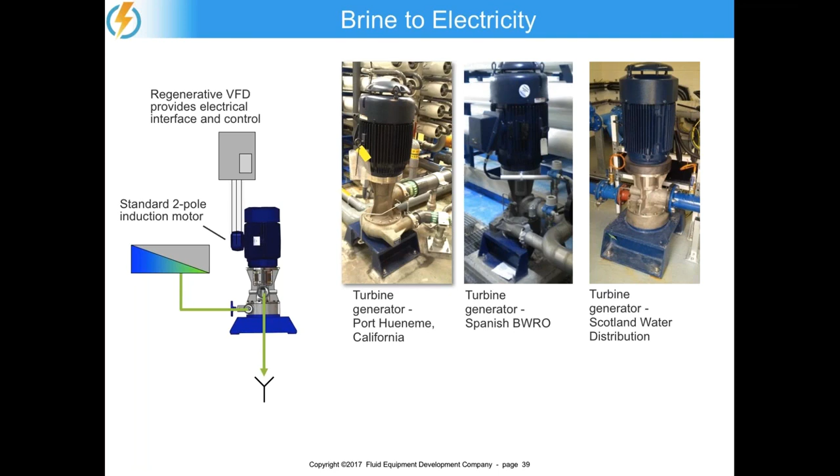There's turbine generators at a Spanish RO plant recovering the hydraulic energy from the brine stream. The rightmost one is in Scotland, but it's not an RO facility. This is actually in a water distribution system, at the bottom of a hill. Instead of a pressure reduction valve, they put in a turbine generator. It's been installed and running for years, working great. So that's another non-RO application for energy recovery for water distribution systems, especially in areas with hilly terrain.

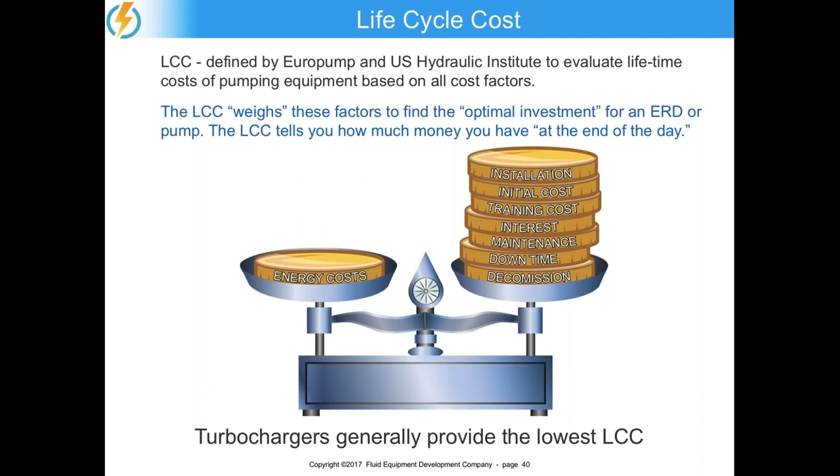So you have to really think about what energy recovery device should be selected. A question that's often asked is, what ERD should I use? The rule of thumb would be to use the ERD which has the lowest LCC and impacts the system in the least negative way possible. You don't want the ERD to compromise membrane performance. You don't want it to add to customer or operator training. You don't want it to increase the downtime potential. So the default answer is go for turbocharger, but if there's other factors, then certainly consider all ERDs. It's our responsibility as responsible designers of water treatment systems to look at all options, but the rule of thumb is go with the simplest and least impactful type of ERD.

And that brings us to the end of the presentation. Thanks for your attention, I hope I didn't talk too fast. Thank you.